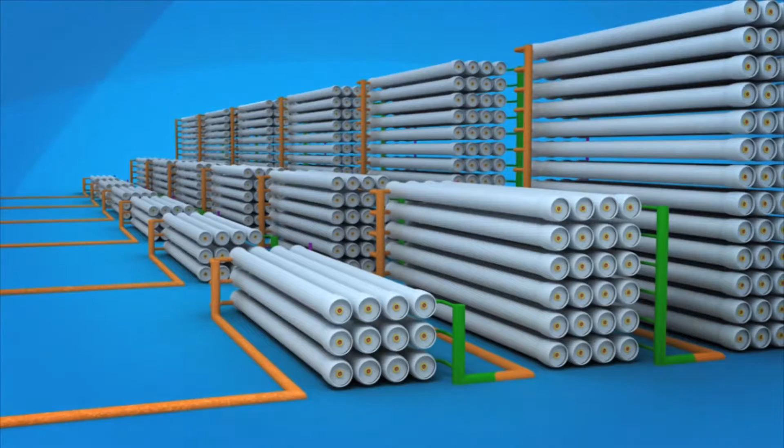The St Mary's Water Recycling Plant uses reverse osmosis to further treat wastewater after the ultrafiltration process. Reverse osmosis membranes are constructed from a membrane flat sheet.

It is comprised of 3 layers: a polyester fabric support base, a microporous polysulfone layer, and a 0.2 micron thick polyamide barrier layer. The polysulfone layer strengthens the very thin barrier layer. It is the barrier layer that removes nutrients, chemicals, bacteria, and viruses from the water.

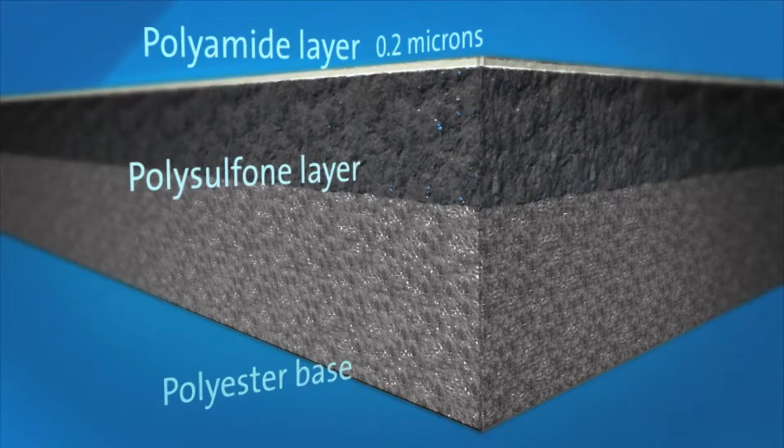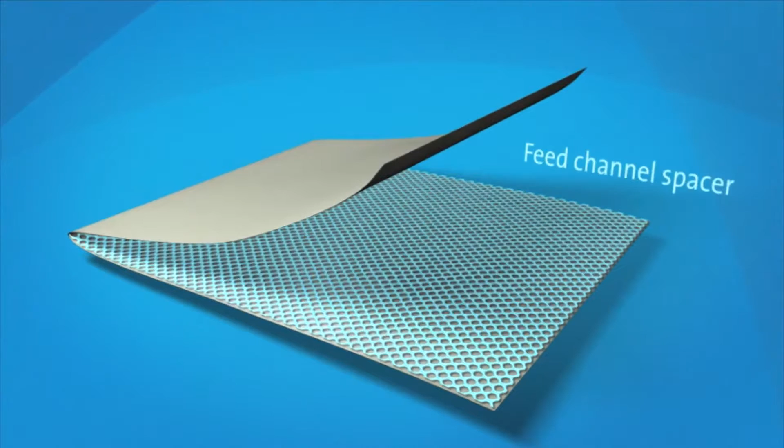The membrane flat sheet is combined with a sheet of feed channel spacer. This provides turbulence and creates space between the membrane sheets for the feed water. A sheet of permeate spacer is added to the membrane sheets and feed channel spacer. This enables the final recycled water product, or permeate, to flow evenly across the entire membrane surface, even under high pressure.

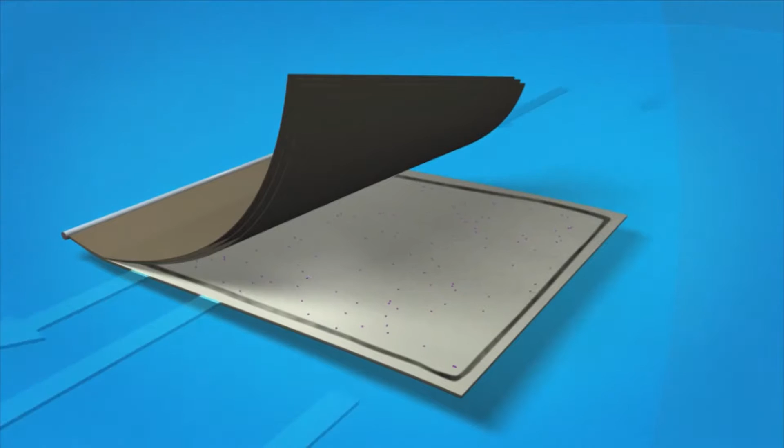The back of the membrane is completely sealed to the edges of the permeate spacer. The membrane sheets are glued along each of the 3 exposed sides and rolled around the core tube.

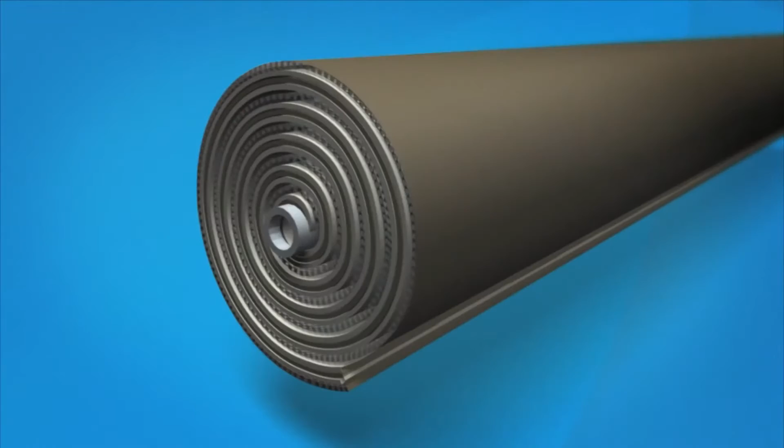Feed water is forced through the feed channel spacer and into the barrier layer of the membrane. Water passes through the membrane surface into the permeate channel. It flows in a spiral direction and collects in the core tube. This water is the final recycled water product, or permeate.

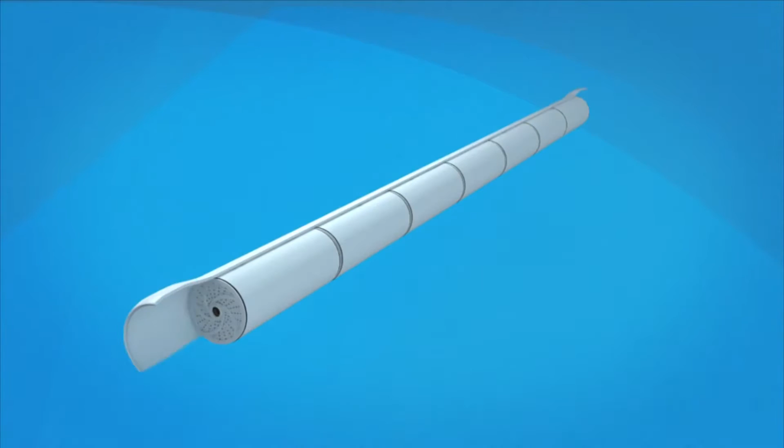There are 7 spiral wound elements loaded in one pressure vessel. Once the end adapter is connected to the last element and the pressure vessel is sealed, feed water can be introduced. Feed water is pumped at high pressure into the vessel.

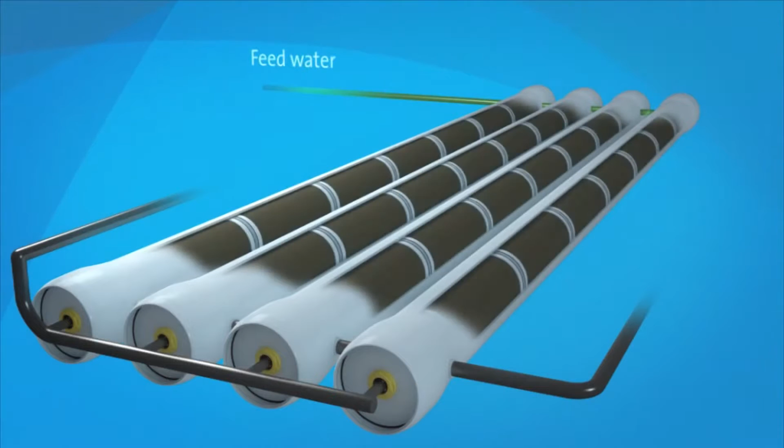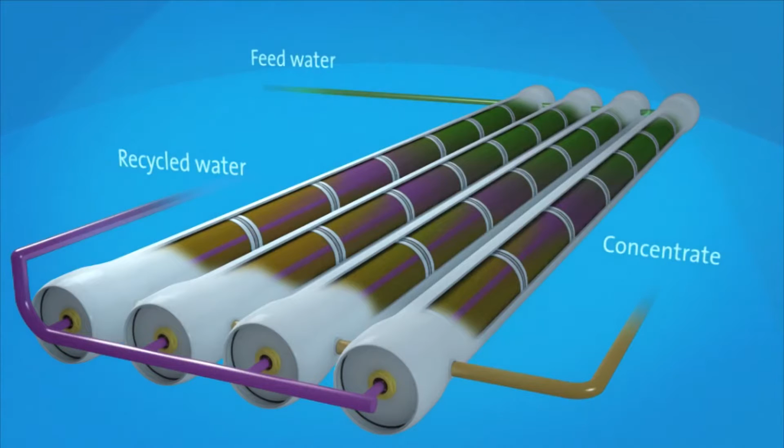As it travels, small molecules like water pass through the membrane, while larger particles such as salt, bacteria, and viruses do not. The final recycled water product is collected from the end of the elements. The concentrate or reject from that vessel flows to another stage, producing more recycled water.

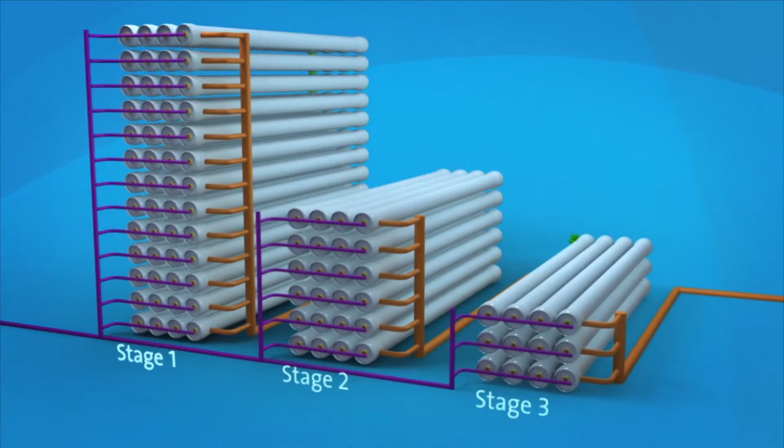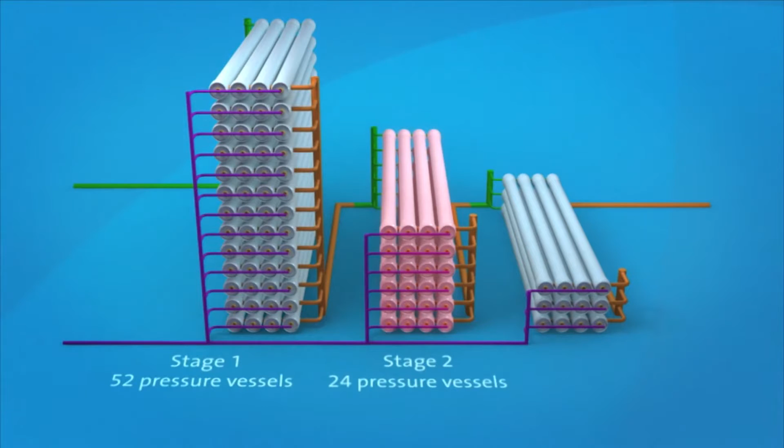At St Mary's, there are 6 reverse osmosis treatment trains, each with 3 stages. This design produces the highest amount of recycled water with reduced concentrate waste. Stage 1 has 52 pressure vessels, Stage 2 has 24 pressure vessels, and Stage 3 has 12 pressure vessels.

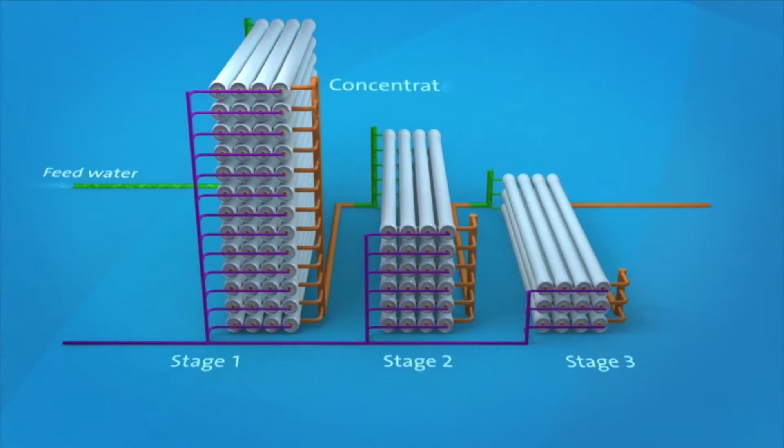58 million litres of feed water enters the reverse osmosis system on a daily basis. As the feed water passes through each stage, more recycled water is extracted. 65% of recycled water is extracted at Stage 1. The remaining 35% is passed through Stage 2, where a further 10% is extracted.

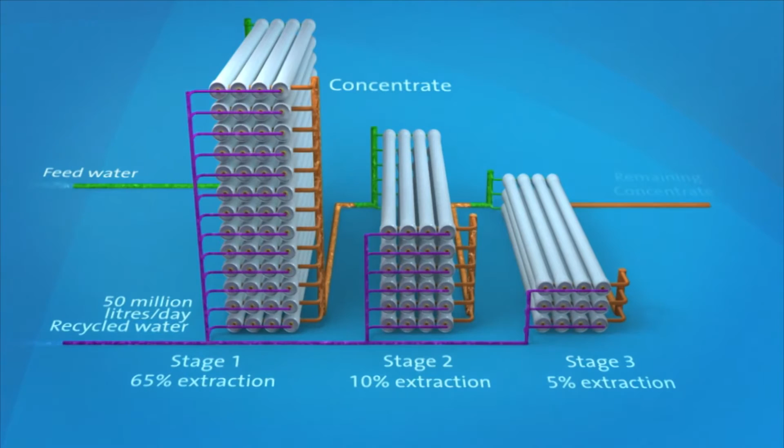The final 25% is passed through Stage 3, where the last 5% of recycled water is extracted. 80% of all feed water is recovered as recycled water. An average of 50 million litres of recycled water is produced every day at St Mary's.

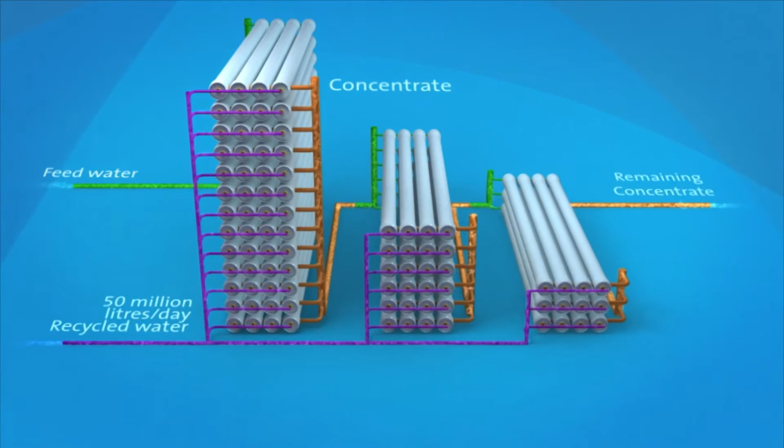The remaining concentrate contains so much salt and impurities that to recycle it would not make economic sense. This concentrate stream of 8 million litres a day is sent to North Head Wastewater Treatment Plant, where it is treated and released into the ocean.